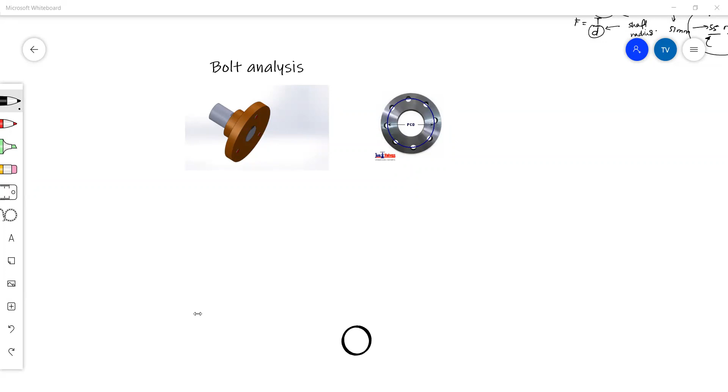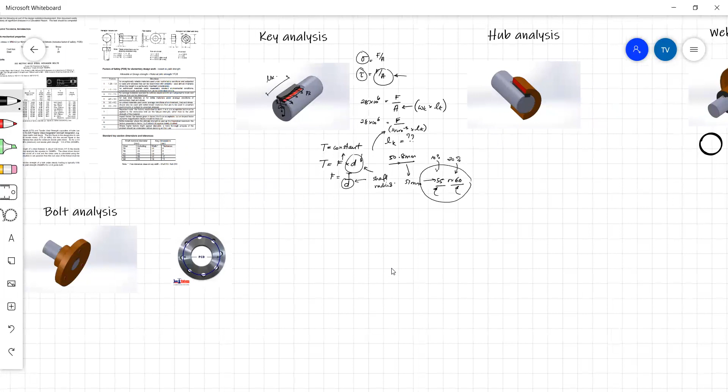Okay, so we move on to bolt analysis, or do you want me to move on to hub? It's just that if I do hub, I'm not sure if I'll be able to make it back to bolt analysis in time. Which would you prefer?

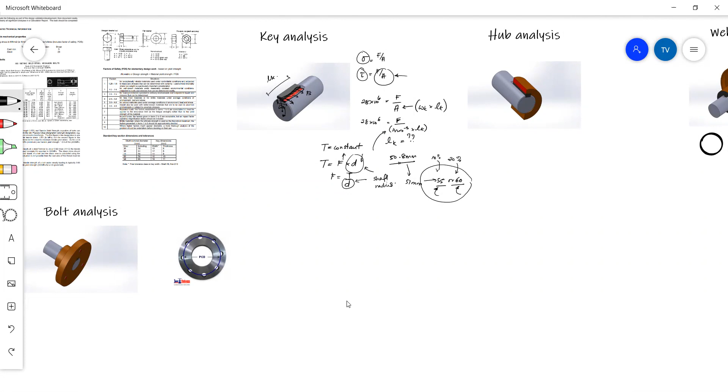Okay, bolt analysis. So bolt analysis is another place where you can differ from your colleagues in their other assignments. The first step when you come to the bolt analysis is you have to decide what your PCD is. PCD is your pitch circle diameter, and that is the distance between the center of your bolts on one side to the center of your bolts on the other side.

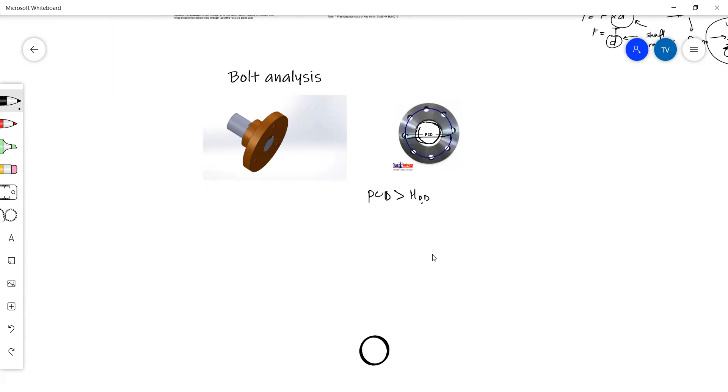So this region in the middle here is for our hub. Our hub goes inside here. Actually, it's not a separate part, it's all one part, but this is the hub diameter. So obviously your PCD will have to be greater than your hub outer diameter, right? So if from your hub analysis you find that your hub is, say, 150 millimeters, your PCD will obviously have to be greater than that.

Now your PCD is also somewhere where you sort of use your logic to decide. So this distance to the center of your bolts is up to you guys. And you have to think about accessibility. Remember, these are bolts—you have to use a wrench or a spanner to get in and tighten and loosen these bolts. So you have to give enough space for the operator to be able to fit their hand or their equipment in there and tighten and loosen these bolts.

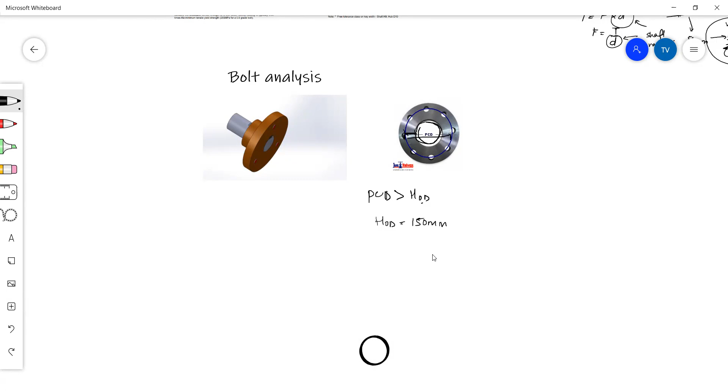So you can make an assumption about how wide this needs to be. Let's say that this is 50 millimeters. You're going to say there's going to be a 50 millimeter gap from the edge of the hub to the center of the bolt for the spanner or wrench to fit inside. Now, if we have 50 millimeters this side, that means we also have 50 millimeters the other side. So our PCD is actually 150 plus 50 times 2. So our PCD comes out to be 250 millimeters.

And our PCR, or pitch circle radius, is half of this. So 125 millimeters is your PCR. That's the first step when you do bolt analysis—you have to make an assumption about the PCD. A logical assumption, right? You don't want to leave this gap too big.

Because if you make it too big, like if we'd say this is going to be like 100, that's a little bit excessive, because now your flange is very, very big and your part is big. And like I said, you have to find the balance between cost and functionality. So choose a logical number for the distance. You can do a bit of research into that as well if you want. But generally around 40 to 50, plus or minus 10 millimeters, is a good bet.

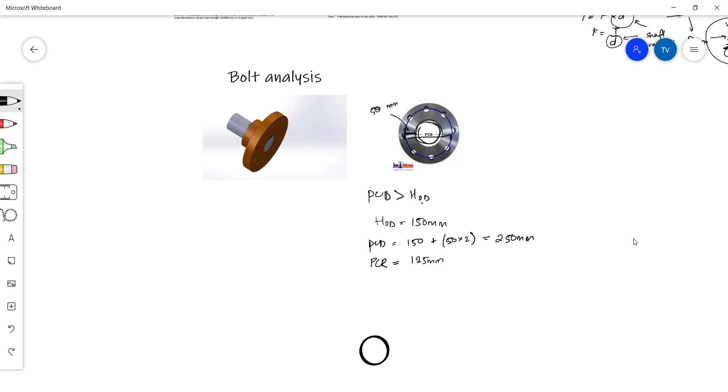Now we move on to the calculation. There are two ways you could go about it. Yes, we did 50 times two—there's the distance above the bolt and below the bolt.

Sorry, Jason, I can't quite hear you. So why did you do 50 times 2? Why did I multiply by 2? There's the distance above the bolt and below the bolt. Distance from the center of the bolt to the other bolt is the PCD, yes.

Okay. So there are two ways you can go about calculating. You could either say the number of bolts—state the number of bolts—and then you have to solve for the size. Or you could state the size and solve for the number of bolts. There's two ways you can go about it.

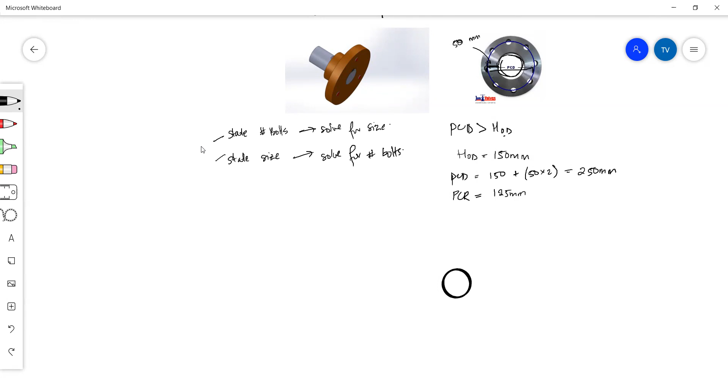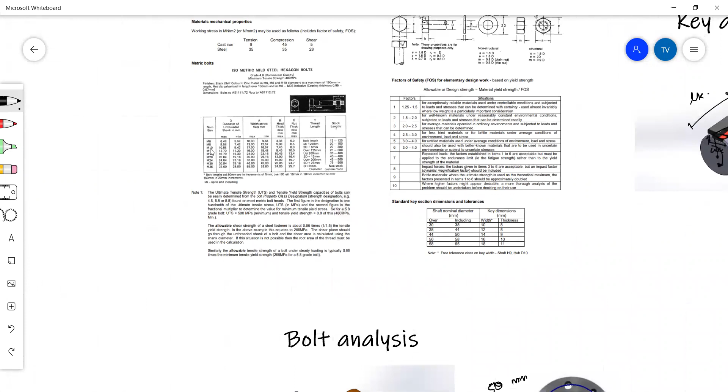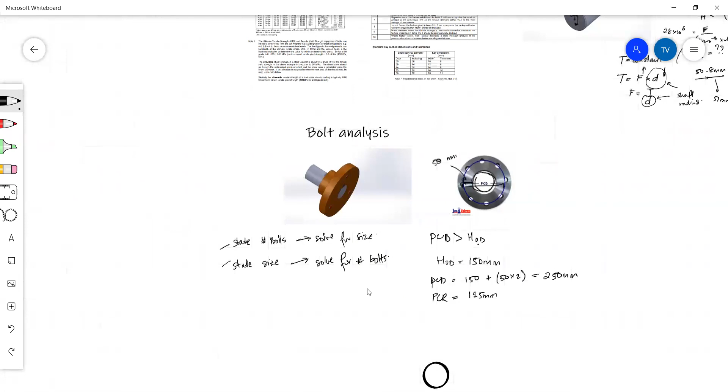So if your group decides, okay, we want to use 4 bolts, then you will have to try and solve for the size of each bolt. And if you say we want to use M12, so if you go back to the table given in the assignment, if you say we want to use M12 bolts, then you have to solve for how many M12 bolts you need to be able to transfer that torque, transfer that power without it breaking. So what type of force again are we experiencing here? What type of force is experienced on each bolt?

Shear force, yes. So we'll be looking at the shear stress, which is equal to the shear force divided by the area. Now the area in this case is the area of each bolt, and each bolt is round, it's got a circular cross section. So the area of a circle is pi r squared.

And total area is the total number of bolts you have, so you multiply it by the number of bolts. Okay, that's your area. Your force is, again, you're looking at the torque, so that's your shear force multiplied by your distance. Your distance from the center to the center of the bolt is your PCD divided by 2, or your PCR.

So this comes in place of your distance. Your torque is constant. So this is how you solve for your shear force. All clear?

So that's why assuming your PCD first is very important, because you need it to do your calculation. Your area is just the area of each bolt multiplied by the number of bolts that you have.

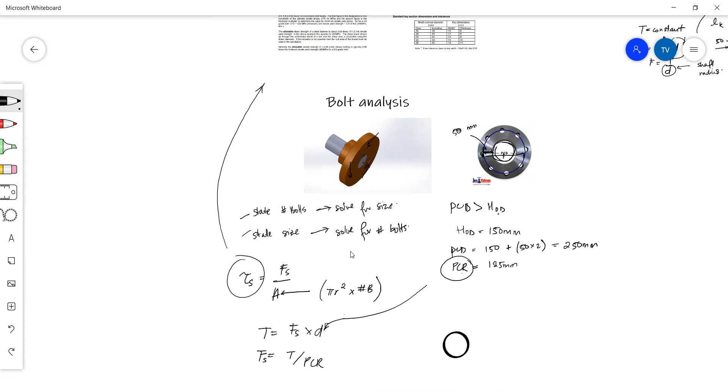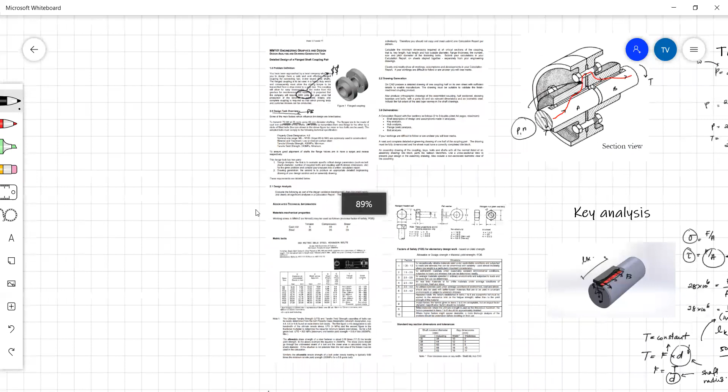The shear stress - if you read the question or the information, it says the tensile yield strength of each bolt is 240 megapascals. But we're not looking at tensile strength because we're looking at shear stress or shear force, so we need the shear strength. And if you read the fine print of your bolt information, it says the allowable shear strength of the fastener is 0.66 times the tensile yield strength.

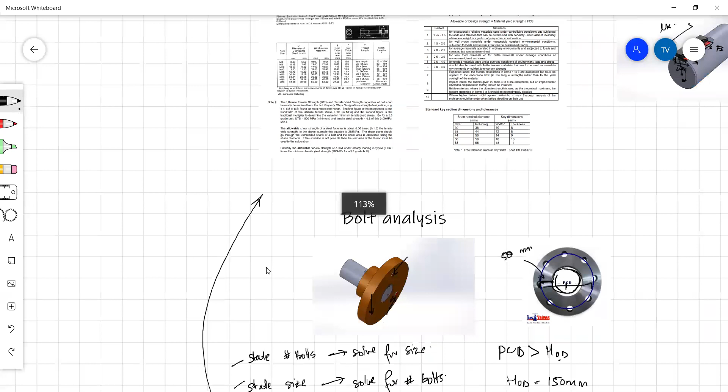That means our shear strength of the bolt is equal to 0.66 times the tensile strength. And we know that tensile strength is 240 megapascals. So our shear stress is 158.4 megapascals.

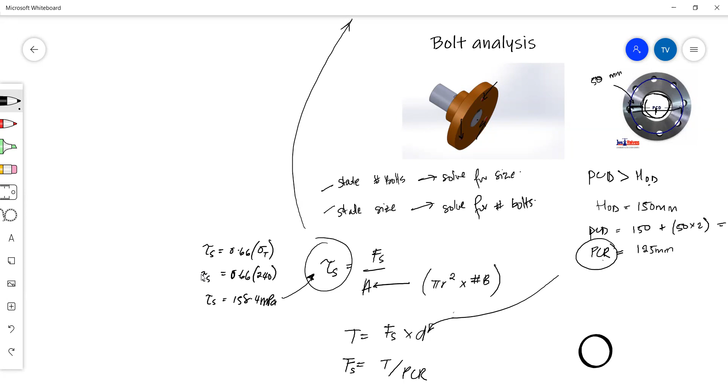So this value you will substitute into the formula, and then depending on the way that you go about solving it. If you do method 1 and you state the number of bolts, your equation will look something like 158.4 megapascals is equal to the shear force, which you calculated here, which is T over PCR, divided by your area, which is pi r squared.

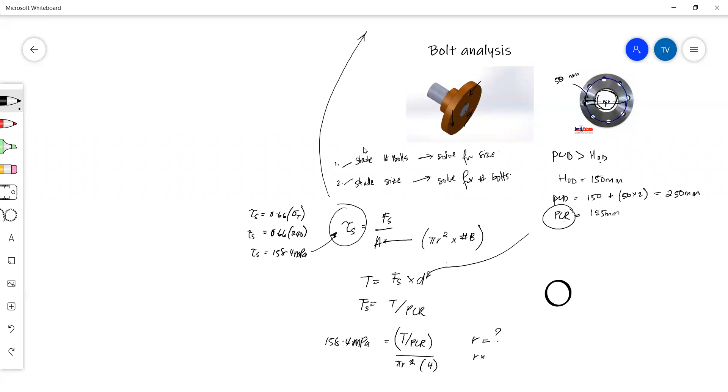R, you're not sure what it is. And the number of bolts, if you say that you want to use 4 bolts, you'll put 4 there, and you will try and make R the subject of the formula. So you solve for your R, and then your R times 2 will give you your diameter. And then this diameter, you will go back to your table and see which one matches up.

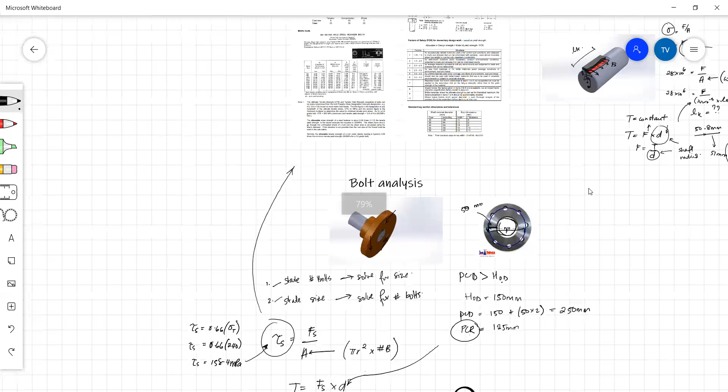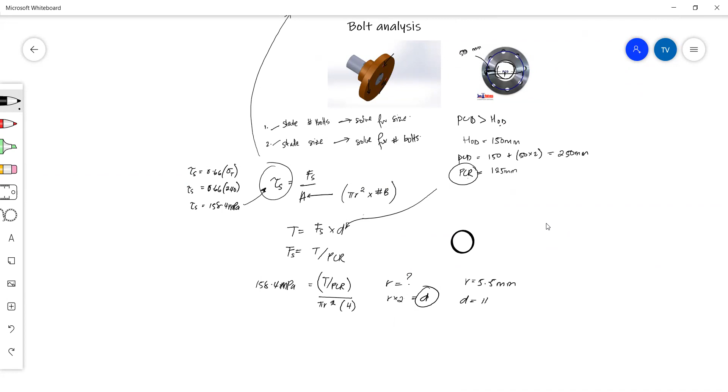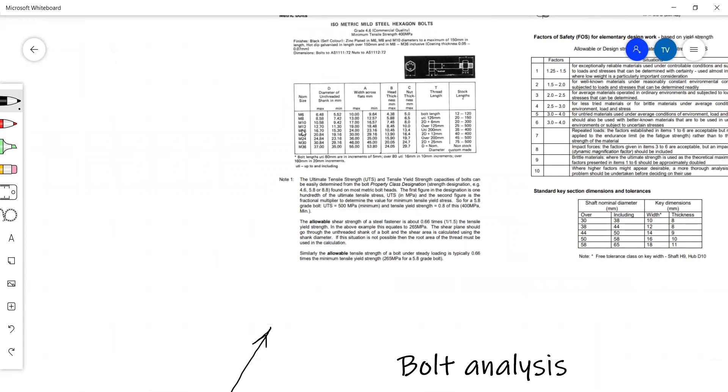So if you do this whole calculation and you find that your radius is 5.5 millimeters, that means the diameter is going to be 11 millimeters. And you go back to the table and you try and find 11 millimeters. Now there's no 11 millimeters, the next size up is M12, so 12 millimeters.

So you could say for your bolt analysis that in order for this flange to function properly, we need to use 4 by M12 bolts placed at a PCD of 250 millimeters. Okay, and this is how you would finish off your bolt analysis. This is the statement.

Okay, any questions? Any questions?

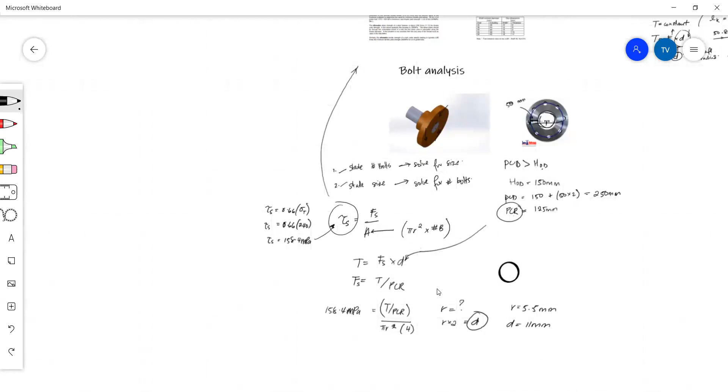Sorry, guys, I think I lost you there for a minute. Where did I lose you? M12. M12.

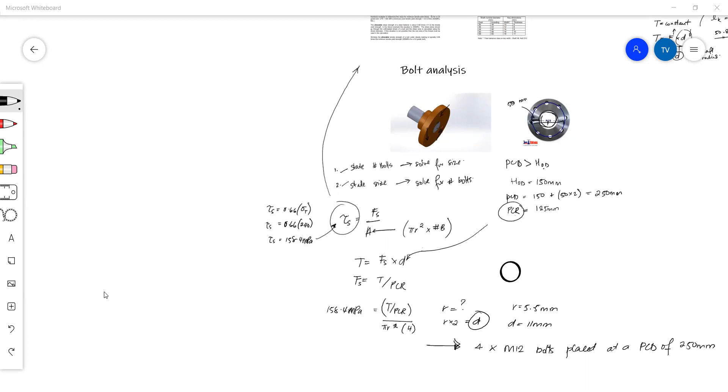So yes, this is how you would go about it. If you're going to state the number of bolts that you're going to use in your equation, you'll be solving for the radius. That radius, you will then find your diameter. Your diameter, you will check your data table for a size that either matches or the next one up. And in this case, M12 is the bolt that best fits. So you could say that you need 4 M12 bolts placed at a PCD of 250 millimeters for this flange to work. And that is how you do your bolt analysis.

Okay, any questions? Any questions?

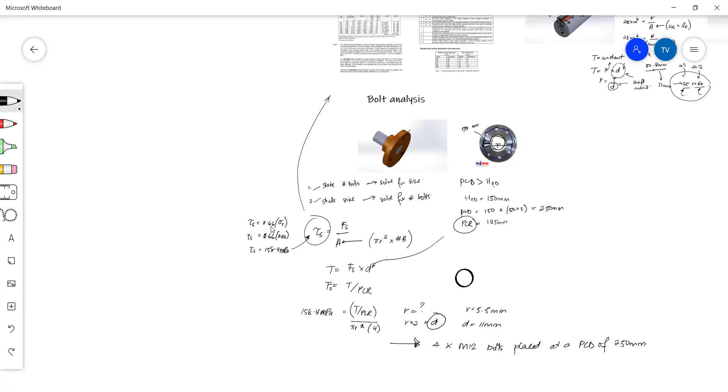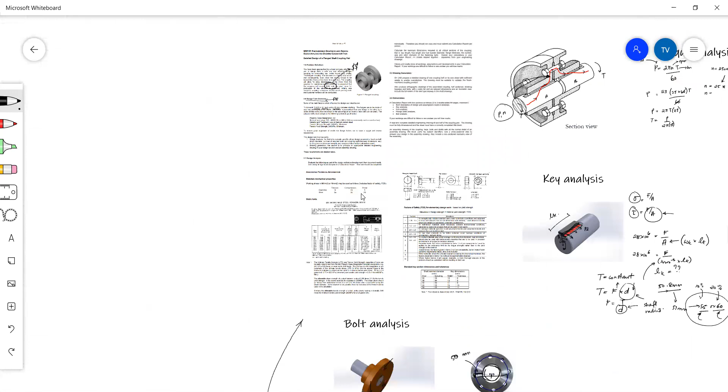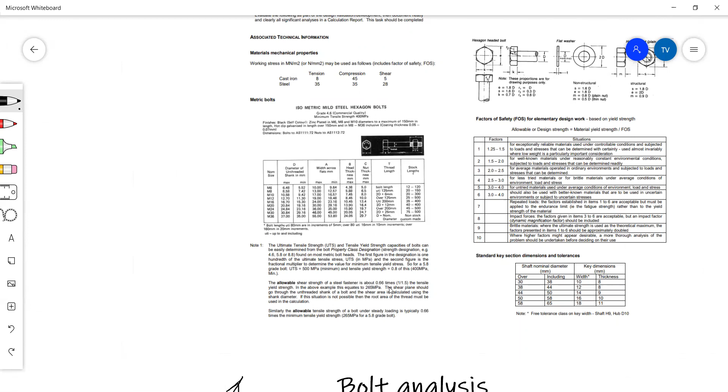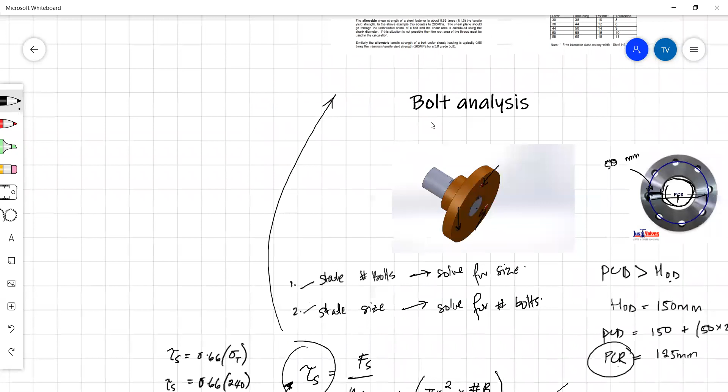So what's the standing for the 0.66? What's the reason for 0.66? Yes, sir. So if you read your information here, it doesn't give us any information about the shear strength, not in the table or in this bit of information. It tells us the tensile yield strength, but we're trying to find the shear yield strength. But if we read this bit of information underneath the bolt specifications, it says the allowable shear strength of the steel fastener is 0.66 times the tensile yield strength. So our shear strength is 0.66 times our tensile yield strength. That's why I've done 0.66 times tensile yield will give us our shear yield.

Okay. Okay, sir. So,

Okay, guys. Well, any questions before we end this session? Any questions?